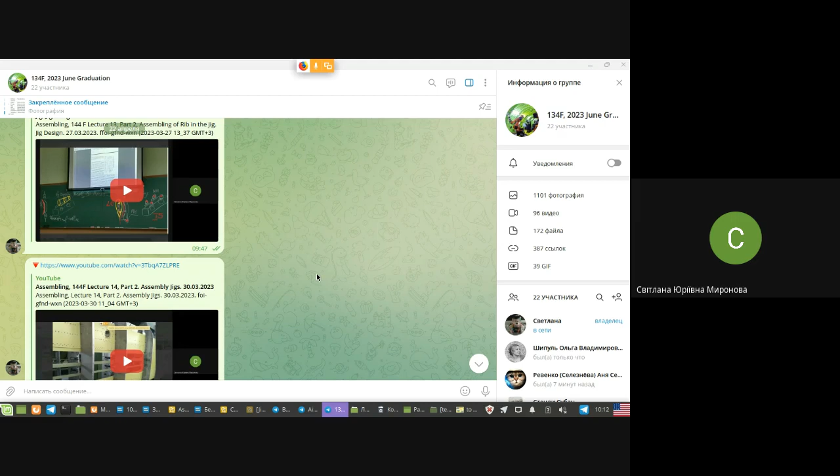My congratulations to Alena. She was there the first day, even 2 minutes before class, and she greeted the previous group, Ukrainian people. If you came on time, guys, you would have had the opportunity to make acquaintance too.

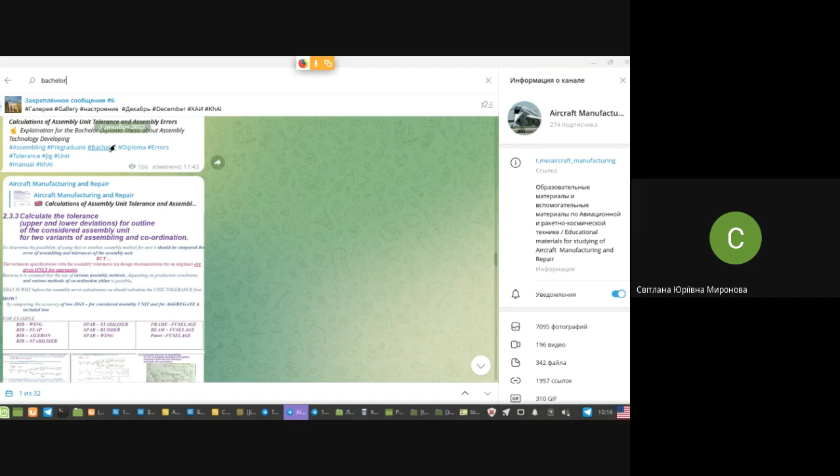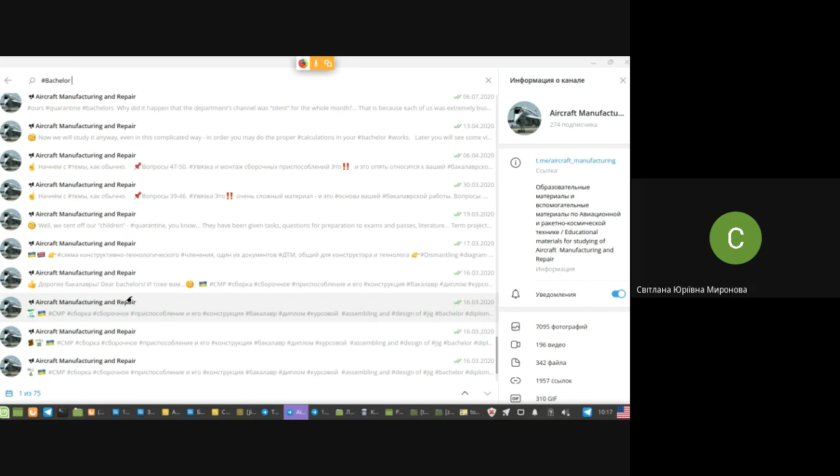And let's come back to the channel to find out the research, to find once again your file by the word. You also have it, these slides and this file. Actually it was in parallel with the lecture, but I meant another thing to do, I meant to find the task to open. It's the old variant of the task.

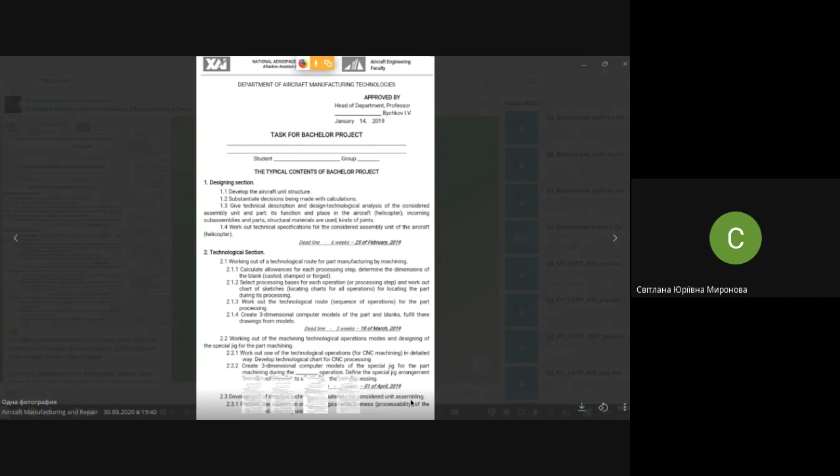Why am I trying to open it? In order to show you this, please, about assembling. You see the development of directive assembly materials. Once again, I remind you it's the old variant, maybe you have a new one now. I'm just trying to open the things related to assembly.

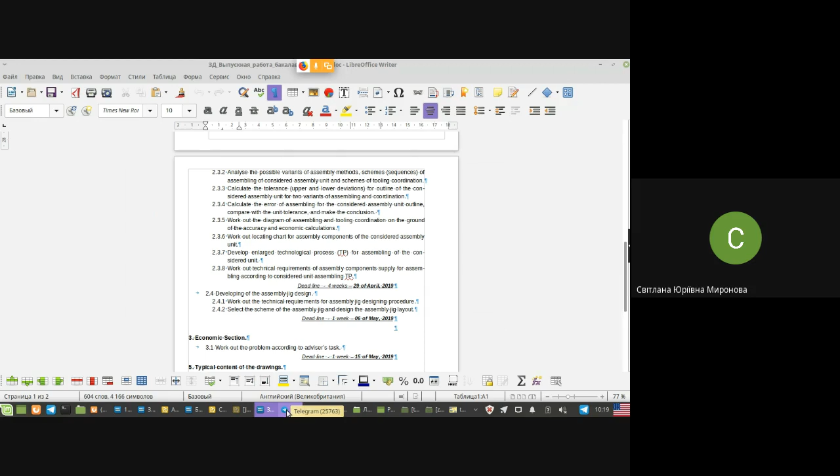I think we will even drop the video now. So, print screen, I will drop you a piece of it. Now you have it in the intermediate task, intermediate course discipline, in Mentor. And what we are interested in right now, look, what did I send you already as a reminder?

What is it? Error of tolerance of the unit and error of assembly calculating. Where it's directly related, pay attention. Item, it's even given here in this item, 2.3.3: calculate the tolerance for outlines. And next, calculate the error of assembling, item 2.3.4.

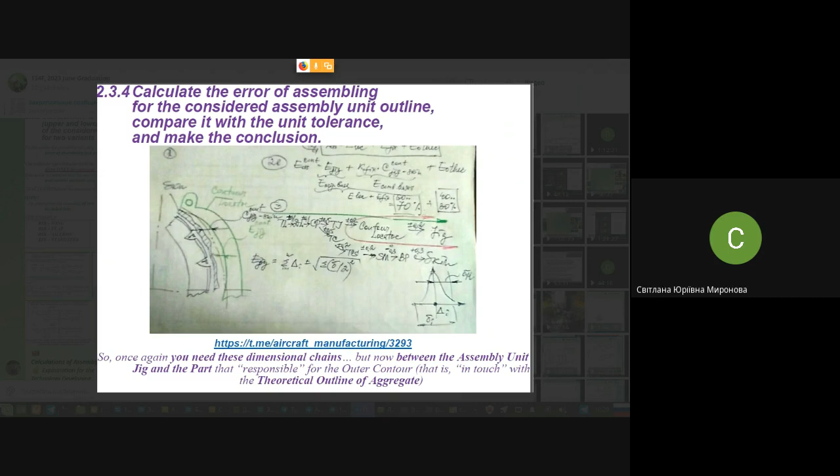In the video classes you have, you might repeat it again. We were discussing similar things with you too, but maybe not recorded, in the middle of the semester. You may repeat it and recollect the sequence of your actions, let it be whatever you suppose you need to do.

In item 2.3.3, you do calculation of chains, the jig and the jig of the aggregate, the jig of the unit, and you calculate the difference between them, the error of coordination between two jigs, so you may understand what is supposed to be the tolerance for your unit, because your unit is inside the aggregate. The tolerance, you know, the limits of sizes, you only know for the aggregate, for the outer contour of the aggregate.

You need to understand what the tolerance is for your unit, which is inside the aggregate. So you calculate the difference between two jigs. Next, you subtract this difference, calculated from the tolerance of the aggregate, and due to this you know what is described here.

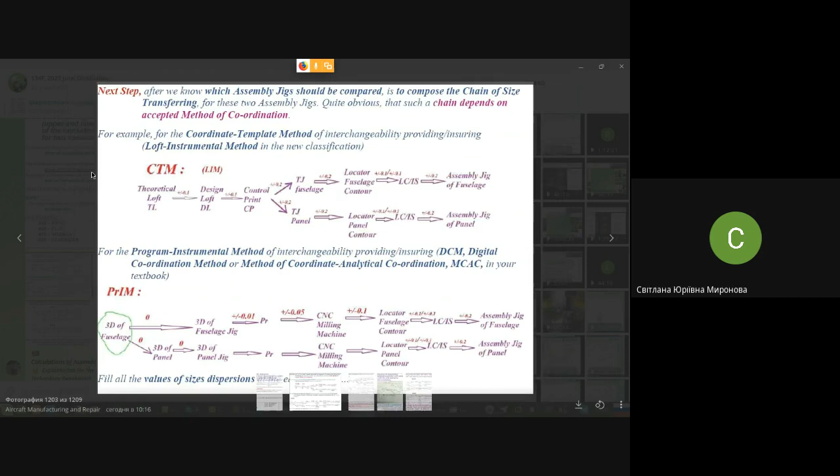Calculating this difference, substituting this difference, you see, unit tolerance equals aggregate tolerance minus error of coordination, the difference between two jigs, and you will know what is unit tolerance due to this.

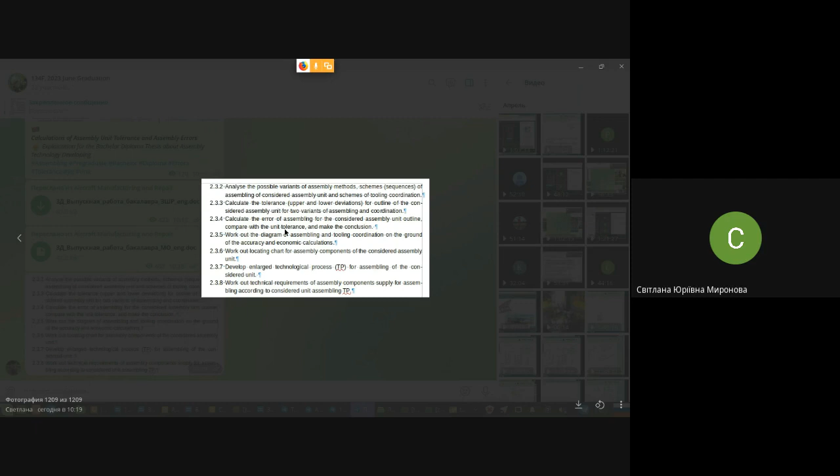Next, 2, 3, 4. Calculate the error of assembling. We have studied this together with you, and you have even, I trust, photo tracks there. Or somewhere here we will meet at the beginning of class with error calculations. Z1, for instance, yes? It's related to explanation about error calculation.

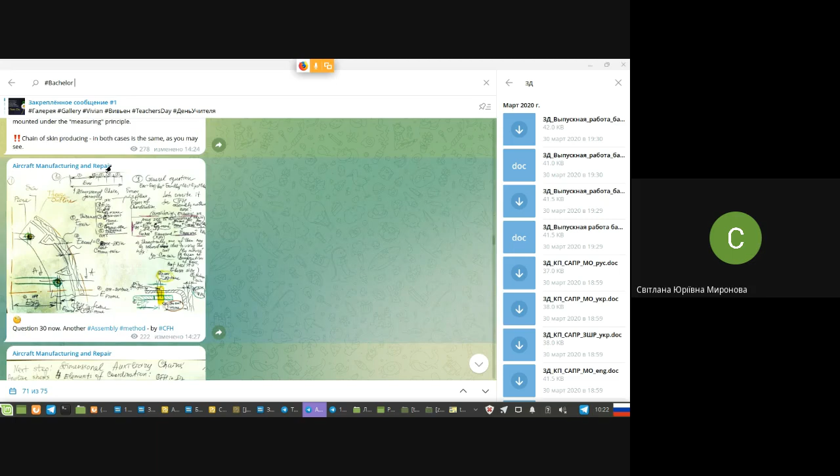Once again, these things, I'm just trying to remind you what you're supposed to remember in order to start calculation of accuracy. Each time, whatever you are working with, either calculation of tolerance or calculation of accuracy, you are working with so-called technological dimensional chains. After you have written these chains, everything else became just formal work. You just need to follow these chains in order to calculate everything around these chains.

And you may say, what is the error of assembling? What is the tolerance for unit? No problem, in case you have these chains. Question is where to take these chains. Actually, what these chains are about. Once again, remind you, these chains describe history, but in non-technical, non-scientific like explanation.

These chains describe history of object manufacturing and object pre-production. For instance, pay attention to the bottom line, skin. Skin was produced on bending punch. Bending punch was produced from sand mold. Since this place, bending punch and sand mold, it's already history of pre-production.

Sand mold was done by templates of cross sections. In turn, they were made from template of contour, recalculated from template of contour. Template of contour we took from control print, and control print actually it's a photo of design loft, and design loft was made from theoretical loft for old-fashioned techniques.

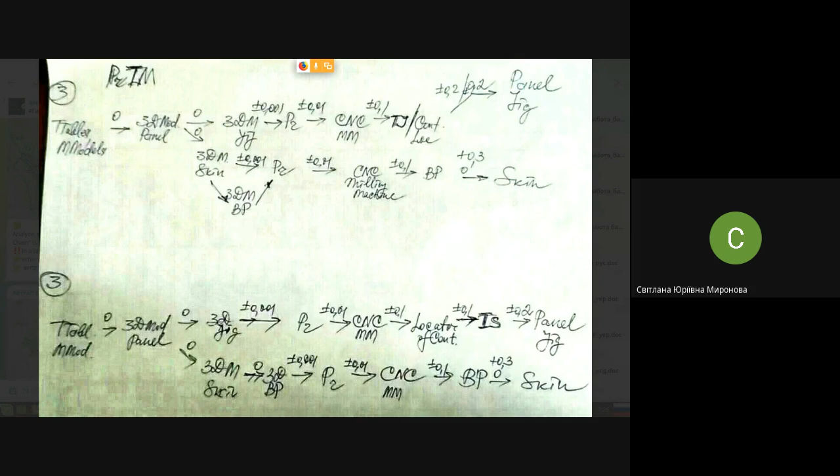And here you have heard this magic word, diagram of coordination. Where do we take these chains? In diagram of coordination. In your task, I hope I haven't closed it yet. No, didn't close it. Among the graphical materials, you have diagrams of assembling and coordination for tooling and parts.

In such a diagram, you will have chains which grow from bottom to the top. Also, we have already talked about those things. And also, you have even the whole video class explanation of how we compose such a diagram from pieces, from typified diagram. Two parts, let it be, in this diagram.

They are about the coordination of parts of assembly unit. If you have panel or if you have rib, whatsoever. On the left, you have order of assembling of this unit. On the right, you have order of jig assembling. About 1/3 of this diagram is about the manufacturing of jig, what jig consists of, and what was the history of its manufacturing. And then we're going to talk right now.

In the previous classes, I hope you already have seen even videos in order to repeat materials. Yes? Typified diagrams for rolled parts made of sheet, for stretched parts made of sheet.

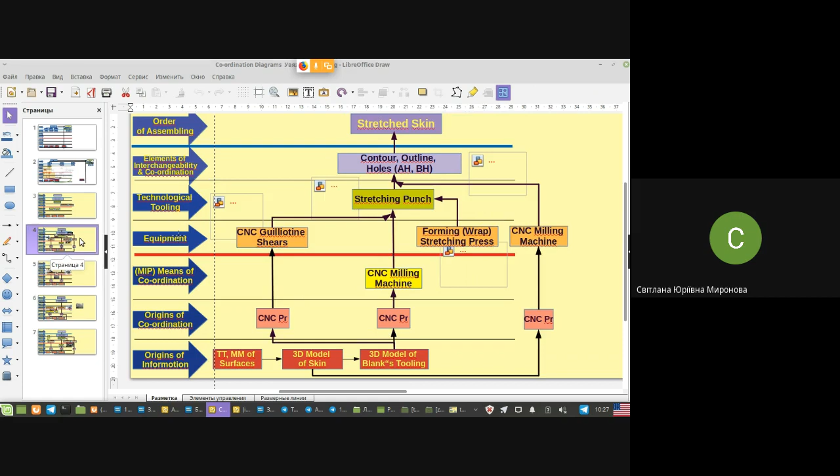Why it doesn't work? Because too many files are opened and I see preview normally, but I don't see the ready file. Those things we have already talked about.

It's typified diagram for parts. Now we are going to talk about typified diagrams for jigs. I will close this in order to reduce difficulties for the computer.

Wait a second. Yes, and that one. Whether we need it or not, no, maybe we will need it. Okay, let's stay here. What is it? Why?

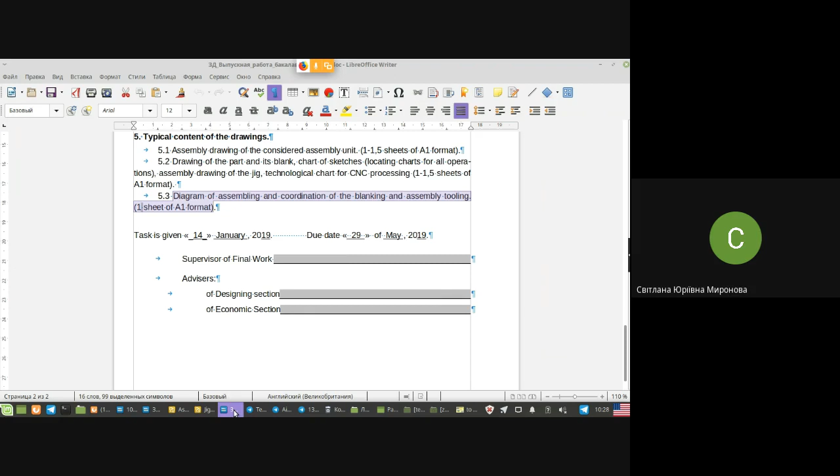Well, let's come back to the place. I said I will not explain you in progress, do forgive me. Actually, these diagrams were drawn together with another group practically during the class, and I will explain you only what you already see, like in result.

Above all, to compose the diagram of coordination, first we have divided this sheet onto 7 levels. You see, since bottom: origin of information, origin of coordination, means of coordination. Next, equipment, machines which we need, technological tooling, elements of interchangeability and coordination, and order of assembling.

And pay attention each time. Next, we will talk about assembly jig. Maybe some diagrams are not finished, I do not remember this. Maybe some diagrams we don't even need. We will see it later.

Look, to start with, order of assembling. What do we have? Assembly jig. Assembly jig typically consists of some skeleton, carcass, and some locators. Not all the jig has all types of locators, not all the jig needed. Here it just explained the maximum possible set of locators that you may meet in your bachelor work.

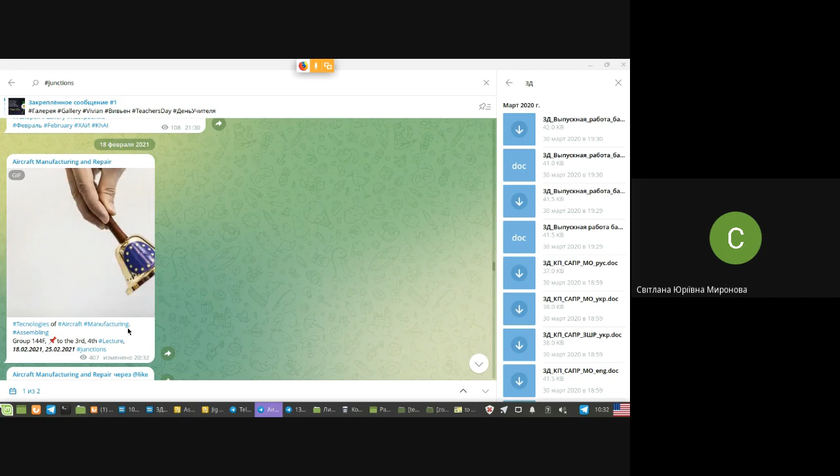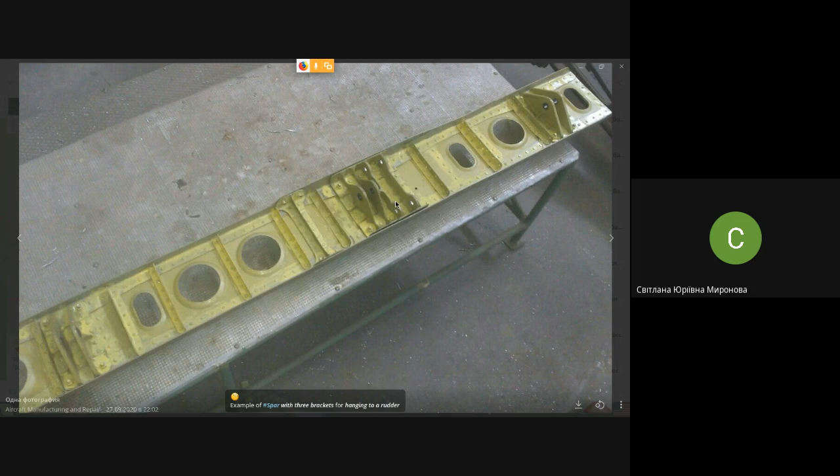You see now this spar is hanged on locators of fork type junctions, just in order you may recollect it. Similar things we were talking about when we were talking about the jigs at all, when we were talking about the lab mounting standard and so on.

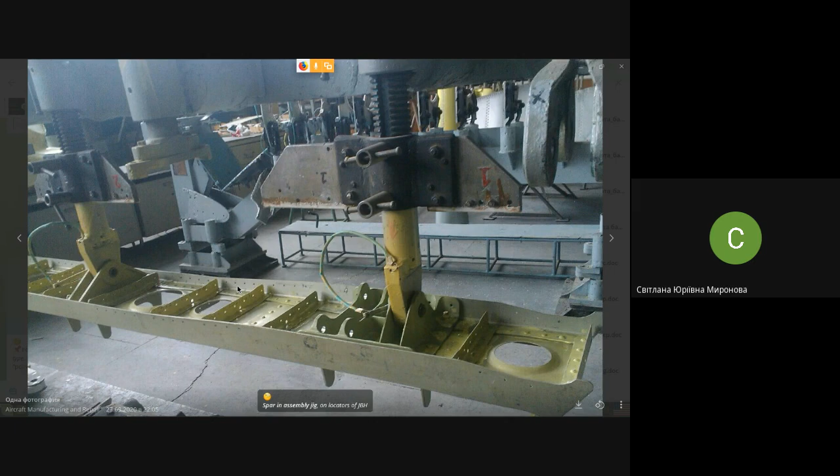What do we see right now? We see that locators of junctions that we are going to place here, you see they are separate, yes? But they must be on correct distance, they must be on the same axis. How did they find this place, these elements of jigs? Elements of jigs, I'm not talking about spar right now. How did they find such a place?

They were located by special gauge, you see. Some imitation of wing or imitation of flap, whatsoever you have. This imitation was necessary, this imitator, pretender, it's called gauge of junctions. It was necessary to repeat all the places with very high accuracy. And when you mount in the jig, you attach elements of jig to such a junction.

Why don't we call it mounting standard? Because it does not repeat all the aggregate, it does not repeat it in cross sections like this one, for instance. That is what this couple is, no? They are not just junctions. To be frank, they are mounting standard because they have both elements of junctions and elements of outlines. You see, they are repeating these outer contours. They are mounting standard, that is the only difference.

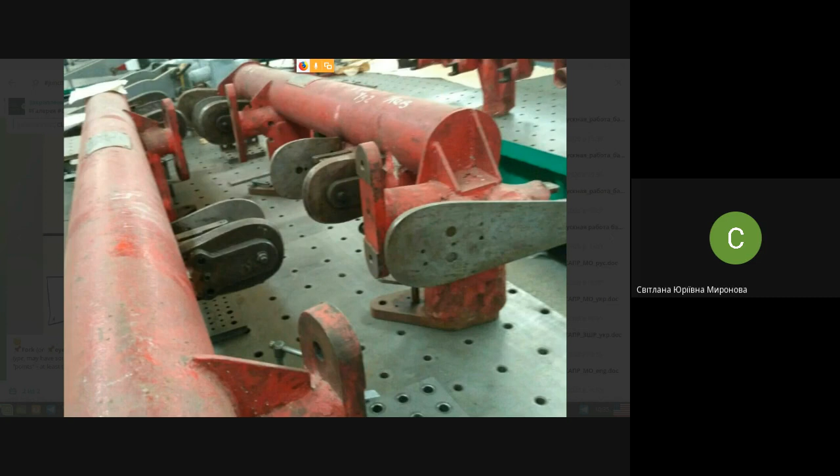In both cases, we are talking about mock-up of our airplane, partial mock-up or the whole mock-up. And this mock-up has ideal variants, let it be imitators, either brackets or contours or whatsoever we need. And when we were talking about flange junctions, let me remind you about such type of junction.

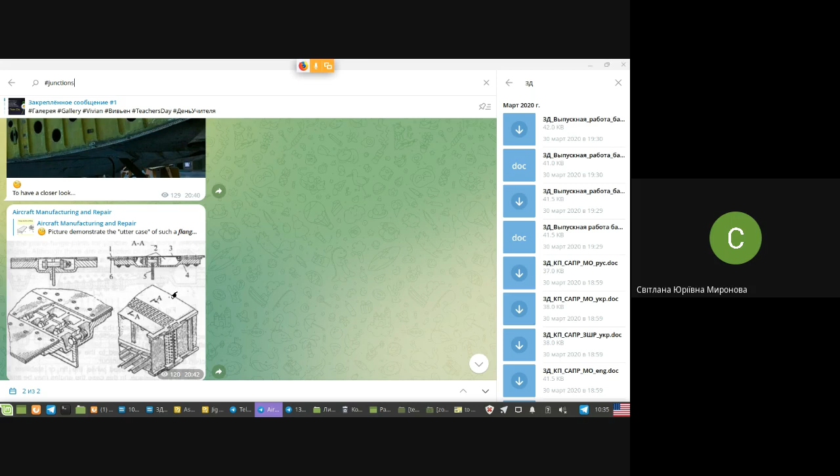It's appeared that it's even worse, especially when it comes to attaching the wing and fuselage, the stabilizer and fuselage, for instance, and especially because of responsibility of these holes.

It's appeared that the jig is supposed to have a special element which repeats both holes and flat surface. Usually it's one surface, but this surface is realized on a good dozen of parts. Here we see a photo of the stabilizer, and we see some elements of stabilizer spar, which actually consist of different parts in contact with this surface, like top cap, bottom cap, web, stiffener, rear spar, also some parts. This first rib, root rib, also consists of some elements, and all these elements must be aligned into one surface because they all have holes for attaching the stabilizer to the fuselage.

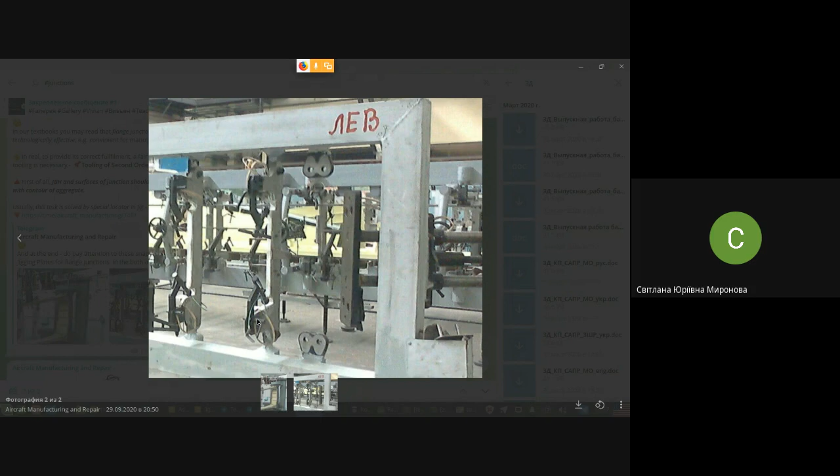What that is, the jig of stabilizer as a whole, and jigging plate of stabilizer jig, is a special structure which imitates a straight, flat surface, and has all the holes of GBH that you need. And that is, you see, jigging plate in a jig for spar already. By the way, it's visible that the whole jig, what it looks like, is a skeleton and system of locators and clamps. I hope you remember all those pictures you are recollecting.

Let's come back to the diagram. Now the question is, as I said, how to locate all the elements in proper position with respect to each other. We have the jigging plate, we have the GBH locator, and all these must be united by a skeleton in the system, which gives us correct results after assembling.

It's not mentioned, what is it? No? How we may do it? Locate separate pieces in the proper position.

Once again, let's come back to your chart. I hope you remember this explanation, that we have only two ways. Either we are copying sizes of jig from the carrier of these sizes, shown here as the element of tooling, either mock-up or gauge. It's the way of copying. We place on the skeleton, the empty skeleton of jig, this mock-up, and attach all the elements of jig to this mock-up.

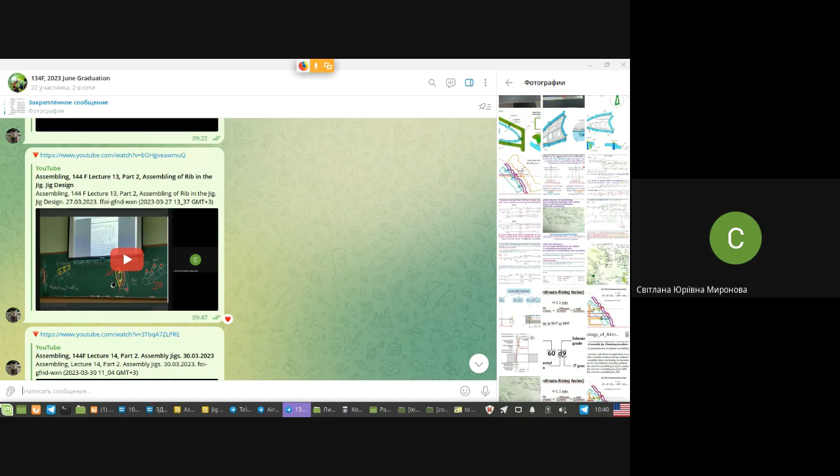30 or 40 years ago, it was sort of science fiction that we may do something like this. We could measure some elements only either with optical devices or mechanical devices, like usual rulers. So instead of measuring complex contours, we were measuring the simple elements of jig. What are the simple elements of jig? Holes, certainly.

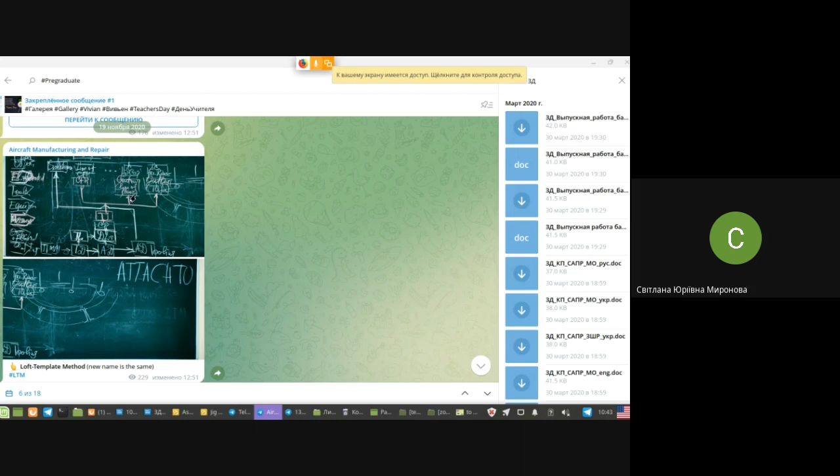Let's come back to the previous scheme. You see two photos - the long blackboard in our 203 class. I made a photo of the whole blackboard and divided things into pieces. You see the overlap of these pieces.

Well, let's come back to the diagrams that we have seen in this file, and let's compare to what you see in Blackboard. Look, diagram order of assembly jig, skeleton, and some locators, some types of locators that we need. Under each locator, we wrote what we are interested in exactly for this locator.

Either its contour, like its final locator, or its GBH, or its CFH. What do you see in the diagram right now? A jig, which consists of skeleton, some locators, locator of CFH, locator of them. You may call it by names of parts whatsoever. But how to understand what sort of locator we have?

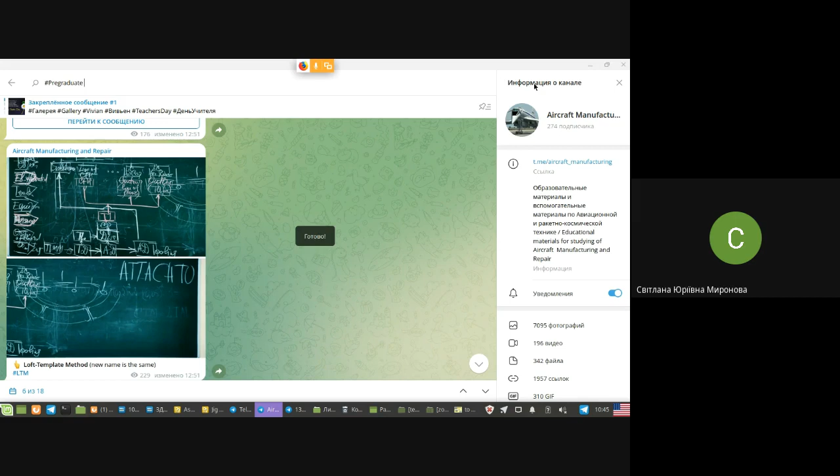The laboratory class that you had as your very first laboratory class, that one about assembling the spar by assembly holes and by their... remind me. In a jig, yes? I just copied you once again, the same that you have already studied.

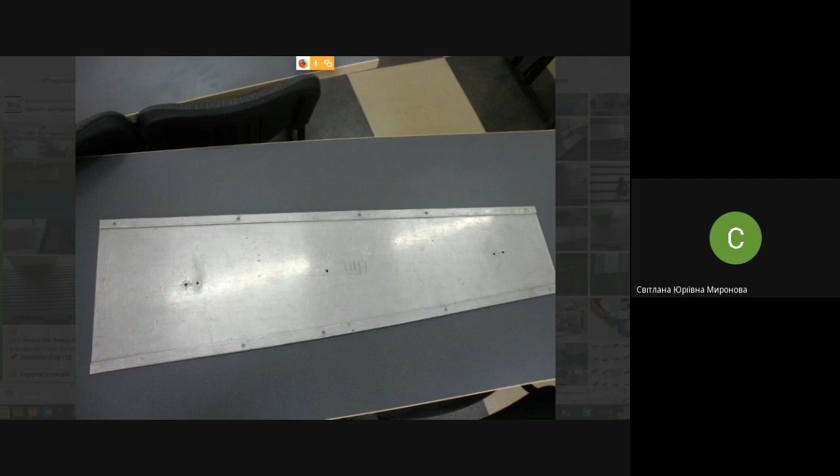And how do we assemble the jig? We had a template, flat imitator of outer contours of the spar, and CFH of the spar. And what did we do next? We attached all these elements, whatever, all the locators that we need. We attached locators to the template. Next, we fixed them in this position. And next, we have a ready jig.

How to describe it in schematic way? Look, we have template, and all the locators, they are joined to this template, as you might see. Template and all locators are placed by the template.

What is the history of their appearing? It was template, and now all the locators know their place. And what is under the template? It's history of appearing of the template, how the template was produced.

Let's come back once again to this diagram that we have. Here it's not template. Here the template is a two-dimensional element. Here you see mounting standard, and next you see this complex line which leads to all the elements of jig. That is, it means attached

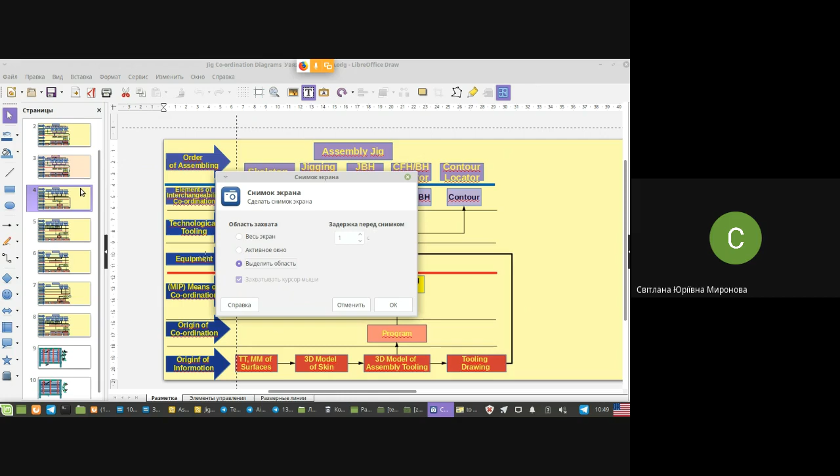What is the difference? I hope it's already obvious for you. Look, the top is the top of the diagram. Is it different or not? No, unless we're talking about some lines I forgot to do here.

Alina, do you see any difference at the top of the diagram? Yes, madam. You see differences at the top? Assembly jig, skeleton, jigging plate. Do you see differences at the top, above the red line, here and there?

Hmm? No or yes? Voice help, please. I see you, Sin, I see Stanley, I see Angelic, and I see Godwin. Do you notice any difference? I mean, significant difference. Maybe amount of elements is different or elements of interchangeability.

Look, visible? The top of the diagram is the same. These purple lines, is it the same or not? Purple lines, purple blocks.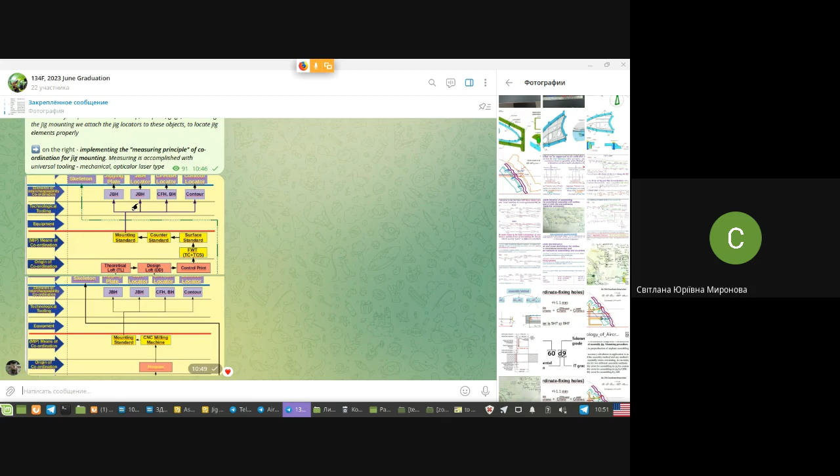Same, the same, no difference. What is different? Look, under the red line, you have quite different rectangles. You have different history of appearing of mounting standard.

Mounting standard, according to traditional techniques, which been in use for the first 50, 70 years of aviation age, was made immediately from another mock-ups, like surface standard, counter standard, and so on, by molding, like we were talking about in our laboratory work.

And those mock-ups in turn, they were made by some templates which came from lofts. If necessary, we may open even right now the book about aircraft tooling, about templates, American books that we used during third year, these historical books already.

Now, what we may do now, we may cut such a master model, master mockup mounting standard, in a CNC milling machine controlled by a program. And this program is generated from the 3D model of assembly tooling, as you might see. So you may have a 3D model of tooling. It includes the jig and any elements that you need, like this mounting standard or template.

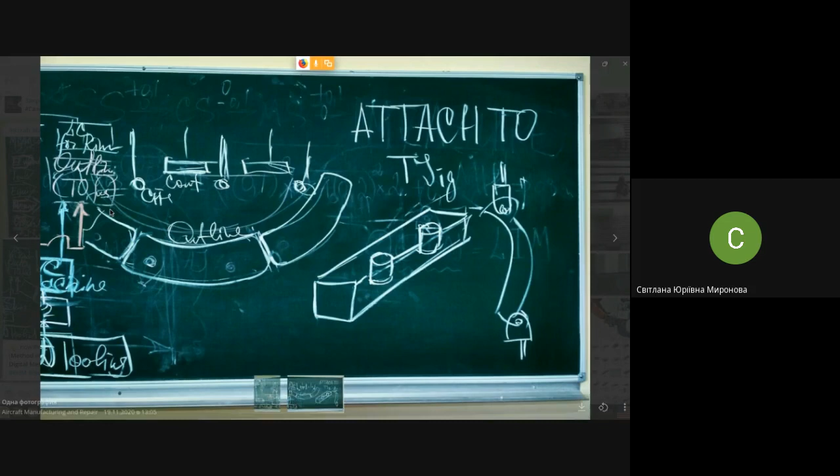Spatial position. Let's compare this one to what we have seen in yellow, in the yellow picture. The same. CNC machine does the mounting standard, and so on.

Seems like from the CNC machine there must be one more line. To be frank, it must even be a separate program, even with the same CNC machine, or maybe a separate CNC machine, and one more line to the contour locator, so we may understand that the contour locator also has complex contours. It's supposed to be cut in the CNC machine.

So no difference, as you might see, whether you use mounting standard or you use this, remind me, where is it? Template of jig. Difference appears only when you change the method of coordination. But the principle, this attaching or measuring, is another story. For each such principle, you may use some different techniques of coordination.

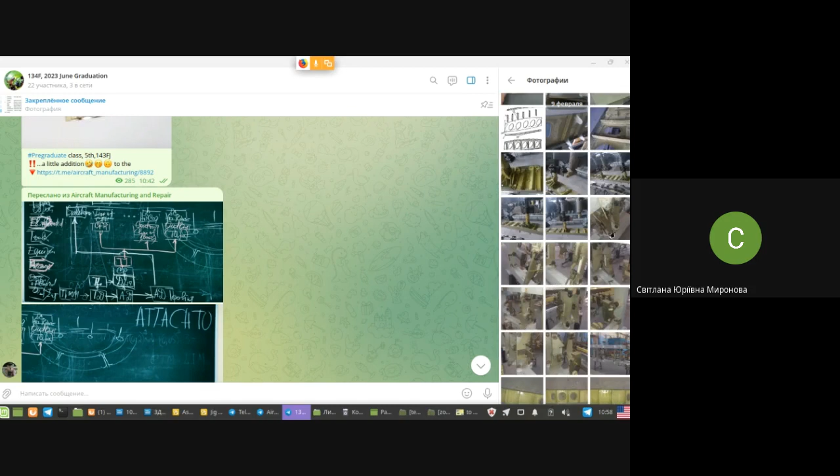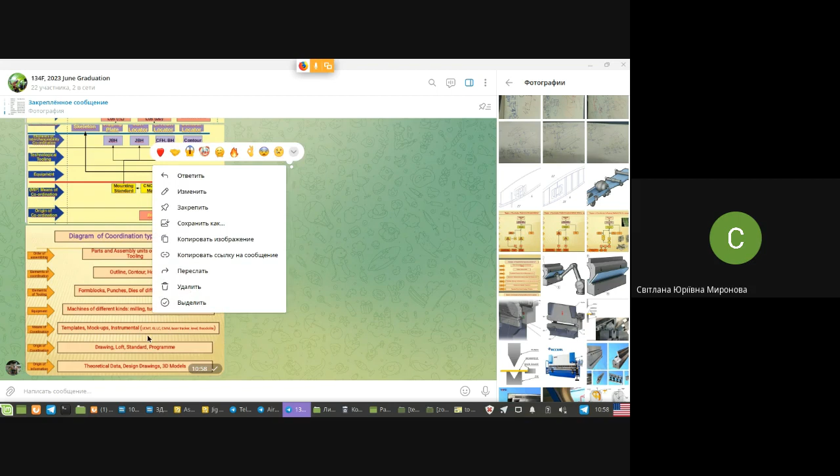What are these different techniques? Remind me. I see. I'm about to cry. So, let's find one more picture. Here it must be.

Look, what this coordination is, this copying principle and measuring principle. And copying principle, in turn, it's maybe by template and by mockup. Pay attention, what is written here?

It's level of what? Say it. Read it. Do we have someone brave in class right now? Alena is the bravest out of our boys, I see. Godwin, Yasin, Angelik, Stanley, please. Yes, what is it, ma'am. What is written? What's this word, what do you see?

Means, means, yes, exactly as he said. Alina is the bravest boy in class. Why? The only girl, the only lady that we have, she is the bravest boy in class. How did that happen?

So, now, other brave boys, please don't answer me. Where do you see 'means' here, what are the means? Visible? What are the means, gentlemen?

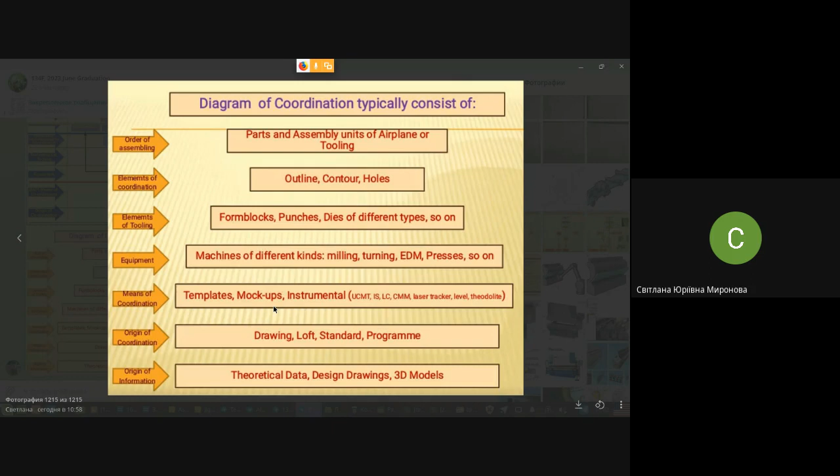Template mockup approach is the same, but the history of appearing, the means of realization of template and mockup in this case, they are different. Either you cut them in a CNC machine, or you are also passing the complex history of pre-production of this template and mockup.

Guys, you make me cry today, as usually. Now, what is changed now? Pay attention. What, with respect to what you have seen here.

Wait, where's the 3D model, lofts? Oh, I found lofts, yes. Look, we have theoretical drawings and lofts here, and here's how it happened, because I'm time to time just changing position of slides in order to have quick access to some of them. So what is changed here?

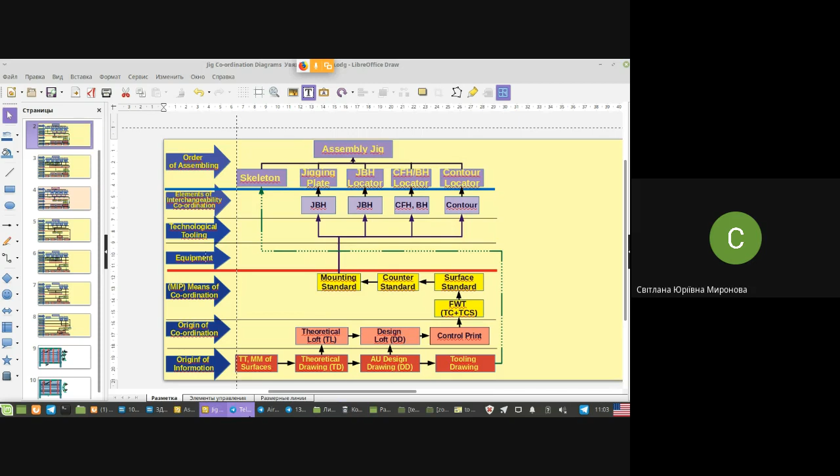Pay attention. In the first case, which I asked you about, whether something has changed at the top of the diagram or not, we understood at last - no, nothing changed. But in this couple of pictures, nothing changed either.

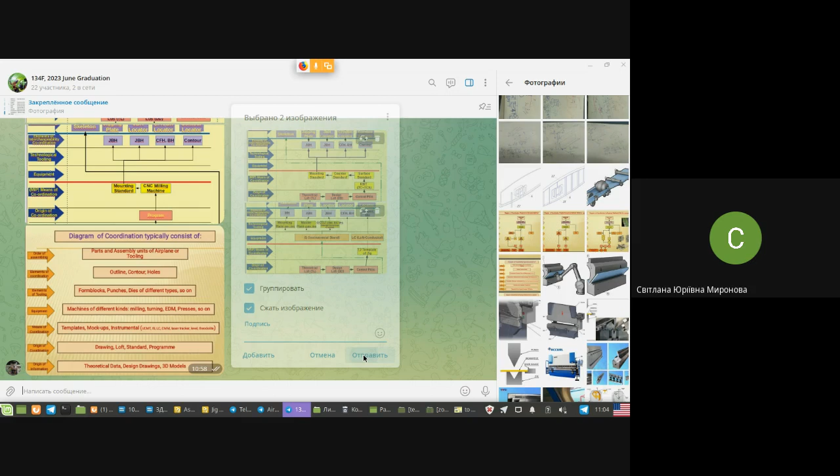Now we have another couple of pictures, the same first one that we have, like mounting by mounting standard, and one more. The jig is the same, it's still the same jig. You see that the compound of jig hasn't changed: assembly jig, skeleton, jigging plate, and you see everything beside of skeleton.

By the way, once again, let's come back to this first couple of slides. Everything besides of skeleton was attached to mounting standard. How was skeleton produced? From drawing. You see, tooling drawing at the bottom, but this line is from tooling drawing.

Drawing of tooling might appear either from design drawing of unit, or in case of modern techniques, tooling drawing was generated from 3D model of assembly tooling, and 3D model of assembly tooling in turn was generated from 3D model of unit.

But anyway, skeleton was made by tooling drawing, and pay attention, no tooling, no equipment is necessary, just line without anything at all. Because skeleton is the most rough, the least exact element of jig in this case, and no one is interested in any element of coordination in the skeleton of jig.

Now we change the approach, people. What does it mean we change the approach? First approach was copying of sizes, and another approach is measuring of sizes. Let's change approach - it was attaching, and now it goes to the measuring.

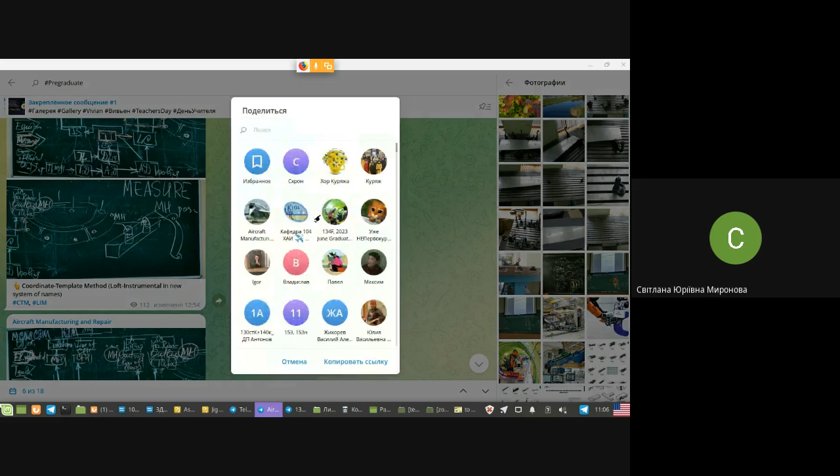Do pay attention what happened. The scheme became more complicated - this scheme and that one. That one looks practically simple, empty in comparison to this one. But the sub-elements, the footage, they are the same. If you compare this diagram and that diagram, everything is the same - the same template of jig, you see.

But what happened next is disaster, really, for most of you. No, not that one, that one. What happened? Let's try to understand. So, program template method we don't need. We need instrumental method.

Coordinate template method - that's the old name you might find in a book. Now in the modern system of classification, it will be called loft instrumental method, because you take loft as origin of coordination in this orange diagram, and template as...

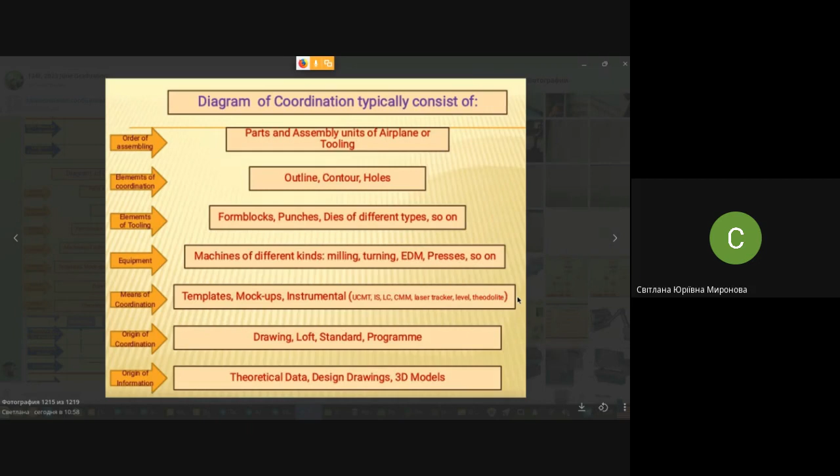Coordinate template - it was called this because it involves measuring the coordinates, and that is why historically this technique got the name coordinate template method. In the new system, which tries to identify everything according to the origin of coordination and the means of coordination, as origin of coordination we have loft, and as means of coordination we have instrumental means for measuring - so it's called loft instrumental method.

So let's see once again. This coordinate template method you see written here is the loft instrumental method in the new system of names. What has changed above, with respect to this one? Previously, in the line of skeleton logic, it was nothing - it was related only to the drawing of tooling. Here is the drawing of tooling, and here is the skeleton.

But along the way, some additional elements have appeared. What are these additional elements?

Also, we have laboratory classes. All your laboratory classes have immediate relation to what we are studying next, which you are trying to implement next into your bachelor work.

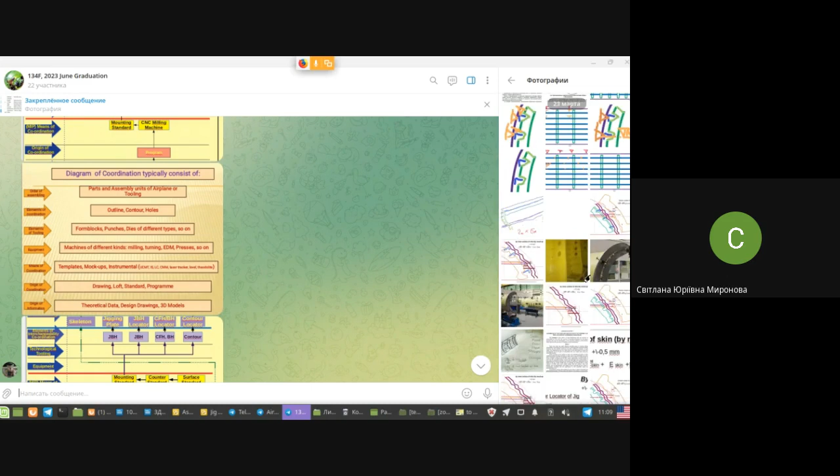Look at this, look at this beauty. What is it? Tell me. At least read it here - do you see where I'm pointing? Do we have any brave person? What is it? Instrumental... stand! Thank you, Angelica.

Instrumental stand, and another thing that is a three-dimensional ruler. I hope you also have seen the video with explanations - a three-dimensional ruler and a two-dimensional ruler, which is called a loft conductor. Forgive me, I'm a bit tired of scrolling, and you may also be tired of this permanent scrolling up and down, so I won't search for these pictures right now or open additional books to remind you.

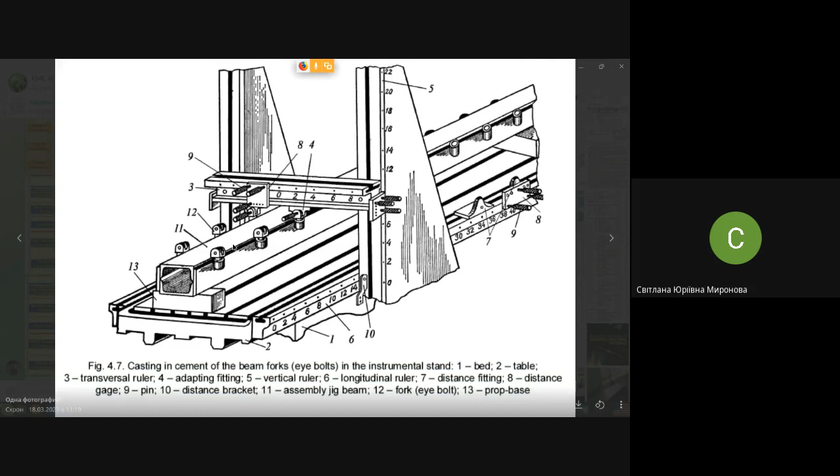But I hope you remember that this is a device for measuring the coordinates of mounting holes in a skeleton of a jig. These are preliminary - no, they are not locators, they are actually something like holders for locators. We call them intermediate connectors - something like brackets with mounting holes.

In our country, we usually place these brackets on cement just because it's simple and very cheap, in contrast to making joints with screws, bolts, and pins additionally for accuracy. Using special mounting cement is the ideal variant in terms of labor input saving and in terms of complexity of work and the qualification of the employee doing this.

So, once again, where in the diagram do you see such a thing? In the very right portion of this short explanation about jig mounting, you see that we have the beam with these fork-like connectors, or eye-type connectors, eye bolts, and pay attention - marked in red color, whether on the left or on the right, is what we're interested in.

In case we're using the copying technique, we're really only interested in outlines, in these contours - we only care about the contour of locators. Now, since we are going to measure the position of locators with respect to each other, we're really interested in these contours, but we implement additional measuring bases - these mounting holes. They existed in the left picture, in this approach, but we're not interested in their positioning at all - they're just holes for connecting, nothing more.

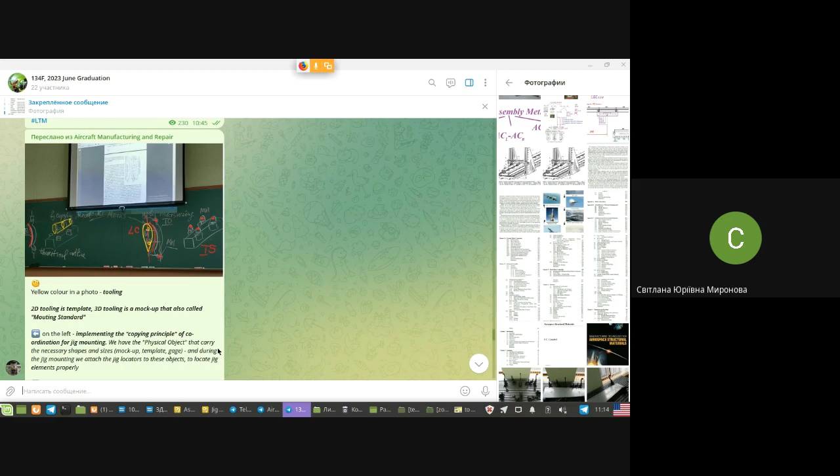So we are interested in elements called mounting holes, and pay attention to the difference between this scheme and the scheme for the copying technique. Here, in contour locators, we have only contour - in the copying technique it was a mounting standard or template, only contour, and nothing else in the skeleton object.

Now pay attention to the scheme which uses the measuring approach. Look at the contour locator - what has happened? What do you see here additionally? MH - what is it? Mounting... help me.

Don't make me cry. MH is mounting what? Help me. Okay, you made me cry - my keyboard is already really wet, it's already the drop of my tears, the pool of my tears between the keys on the keyboard. Hole - mounting hole. Why are you afraid to open your mouth? Are you afraid of the recording or what?

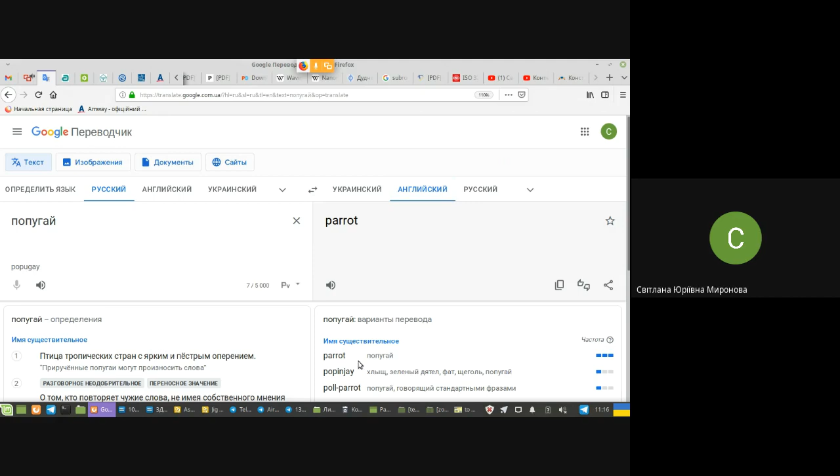Well, those... it's easy to... Parrot. Parrots, of course. If you forgot, was it parrot? Yes, parrot, you know those things, those creatures. Some of them are quite able to imitate people's voices, like this one. Very beautiful, yes?

You don't like it? We like it, madam. I have someone, you have a small one? Angelica, and usually this small one is sitting in front of you at the computer, yes? No? Then answer me please, when I'm asking questions, answer me. MH, what does it mean, this MH? What is it, mounting?

Contour, hole, not contour, hole, mounting hole. Look, in the contour locator we have this - why we do something, in order that you may know something. If you do not understand what I'm explaining, then I'm just wasting my time and your time. Contour is this red line, look, here is the contour.

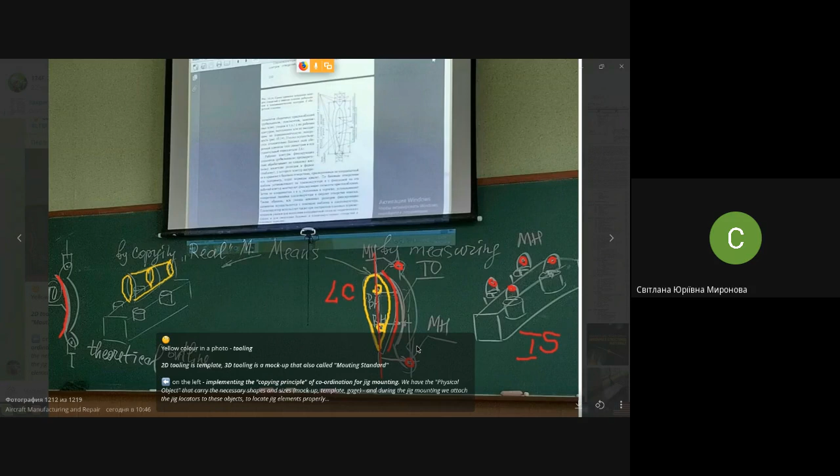Look, what is the difference between these two diagrams? In this case, in the diagram of coordination, we are not interested - as I said - in the left picture, correspond to the left picture. We are not interested in mounting holes. In the contour locator we have only the contour. In the skeleton we have nothing at all.

We are not interested. Now, in the contour locator, besides the contour, mounting holes have appeared, so? And in the skeleton also mounting holes have appeared. I'm just closing the messages one by one so they don't appear open on the screen while we are recording in front of everyone.

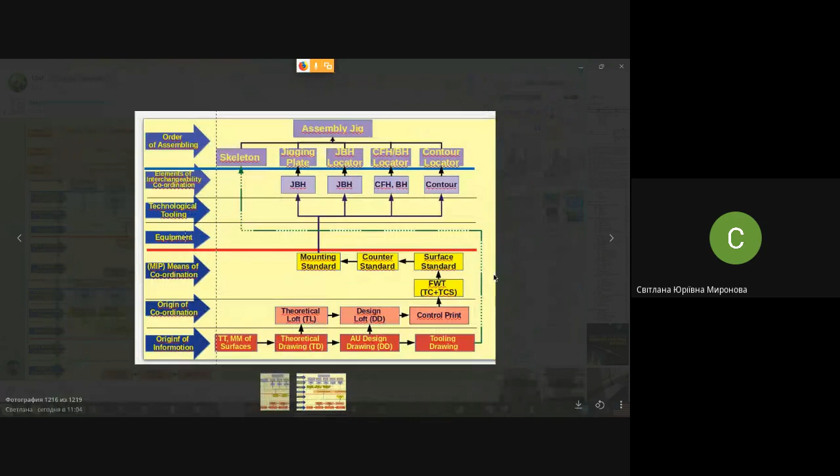Pay attention, in the previous diagram, look at this, template of jig. And there we had - no, mounting standard, yes, no template of jig. Let it be template of jig, doesn't matter. Template of jig here, and nothing else, no any element of equipment. And template of jig here, and additionally we have some elements of equipment.

And the worst, look, here in technological tooling, nothing, no block at all. Mounting standard is responsible for everything. Mounting standard or template, and it's enough. Great, we have everything already, we just need to attach everything to the mounting standard or to the template.

Here, people do a lot of additional tooling, a lot of additional equipment. Actually, what I wrote here as equipment, to be completely frank, must be even in means of coordination. We wrote them as equipment, but they must be here in means of coordination because they are means of measuring.

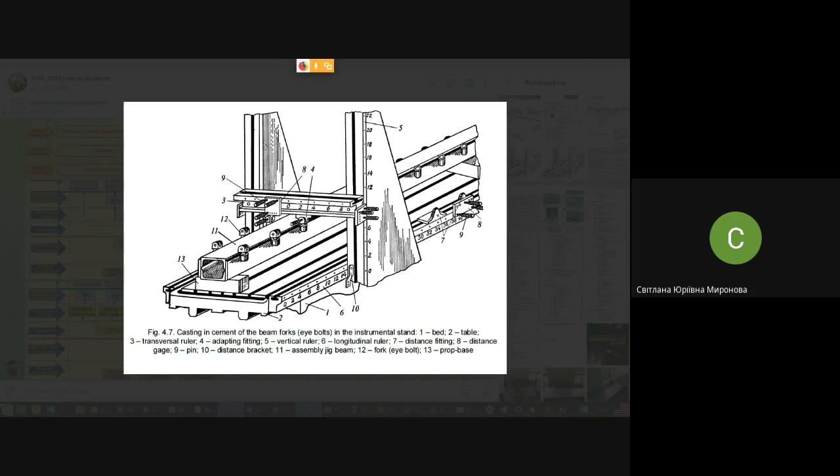Look, this diagram is just stuffed with everything. As soon as we come into another technique, another approach, it appears that we need mounting holes in the skeleton, mounting holes in contour locators. We had it before, but in any position actually. Now we need it in exact position and we must measure them. How are we going to measure them? We have an instrumental stand to measure position of mounting holes in a skeleton, but we just saw that mounting holes in a skeleton - there we see not the whole skeleton, we see one separate beam.

How we may measure position of - no, let's recollect what we have here, it's opened. Oh look, those jigs that we have seen partially, now we see the whole picture of this jig. This slide you also have, in Mentor you have it, you have in the group those slides with jigs. So please, if you need, you may open it and take photos if you need. Or that one, look at this jig - where are the mounting holes?

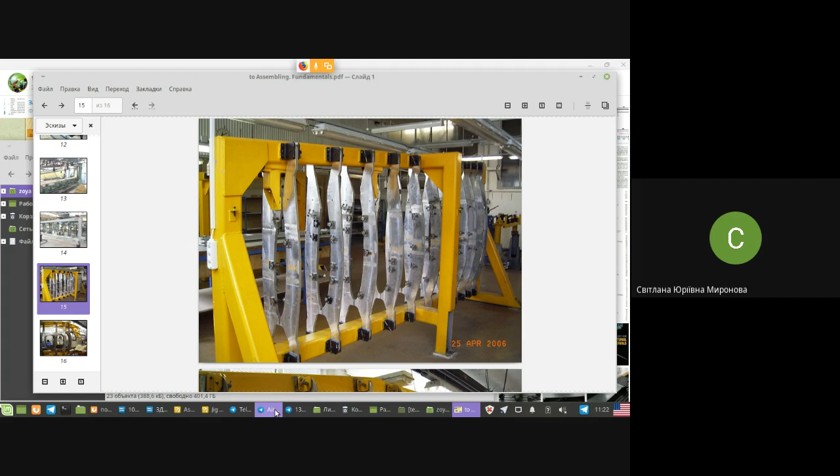Take this photo. Thinking - the computer is thinking, sorry.

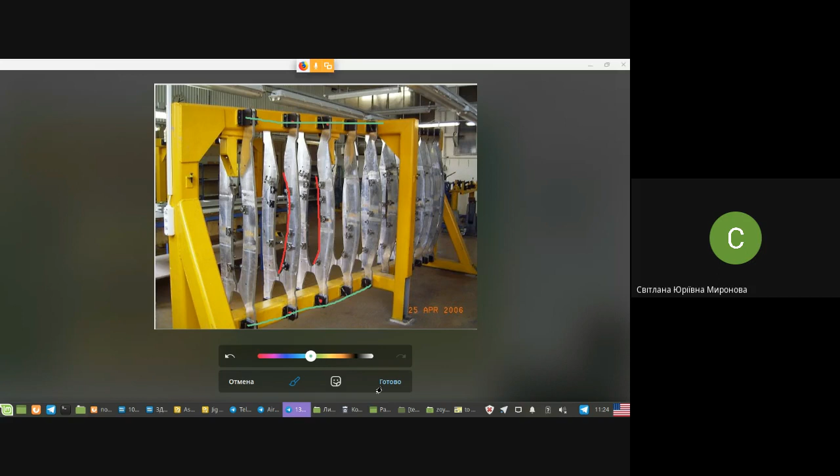Also, such things we were discussing, look, in some different variants. We're talking about the same things each time. Where did it disappear? So much things I have copied here that it's practically difficult to find anything.

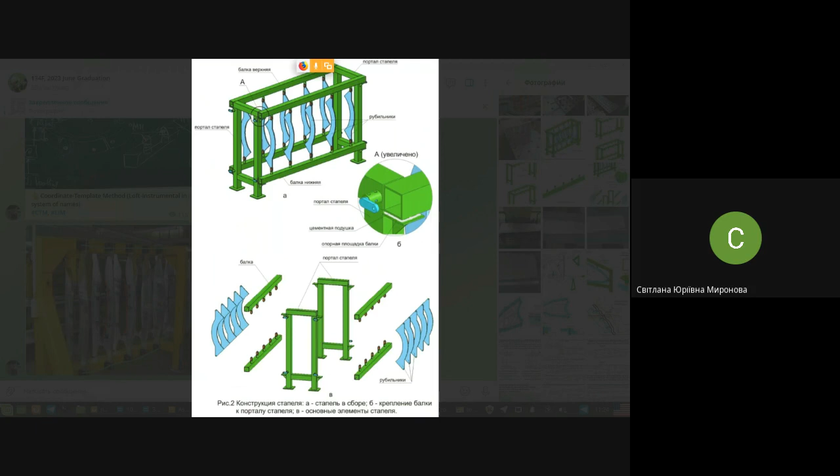What are those? Look, how to make the jig, yes? How to make this jig if they have separate columns and beams? They have only separate beams, but they need the whole skeleton, this green skeleton. How were they assembled from pieces?

It's also important. Look, once again, these elements they belong to - that yellow frame that you see - they might belong to separate elements, these mounting holes. And the first problem at all may appear, not in your bachelor work I hope, because you don't have a big jig. The first problem is how to align elements of the skeleton with respect to each other, which you also studied in your laboratory class.

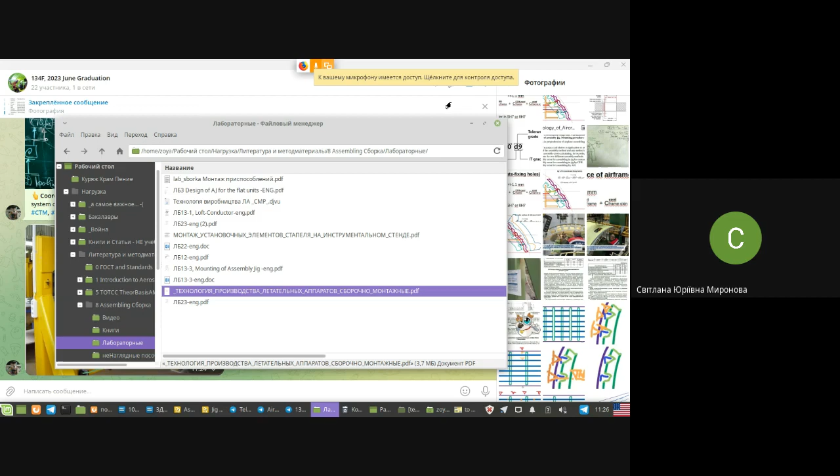Maybe I will open the book at last. I'm tired of searching for pictures. Let's open our manual, the lectures. Manuals about labs here.

It's the lab about mounting standard. I hope you're recollecting. That is the story that we need. Look.

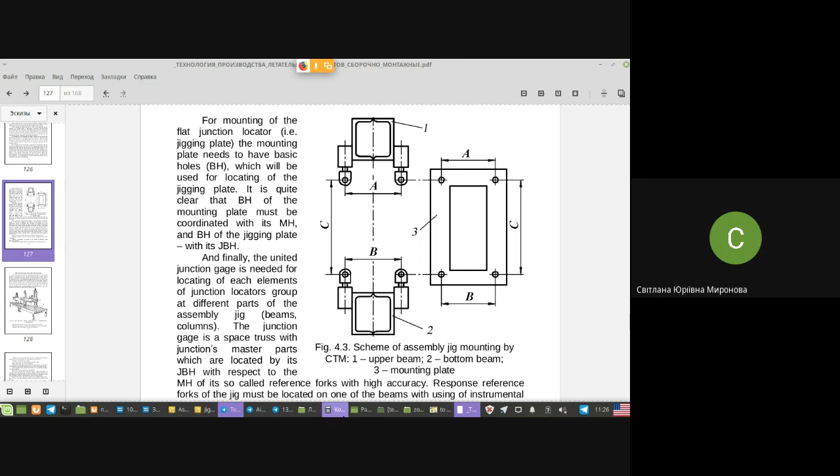How you may mount one beam and another beam into correct mutual position. You see now it's shaded, but anyway you see the previous picture of the jig. You need to align this bottom beam and upper beam into correct position. There are two ways again.

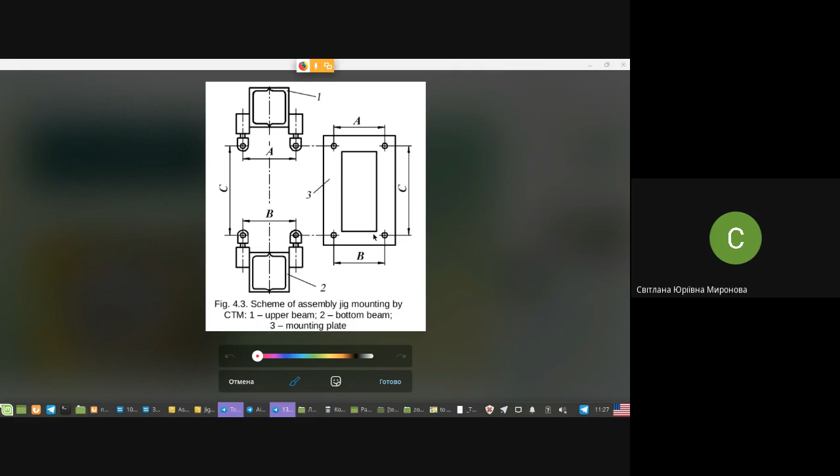Either you do a mock-up, and this mock-up is a mock-up of second tooling order. This mock-up's name is mounting plate. You do a mock-up, something like a gauge of mounting holes. In this gauge you repeat: this hole is here, this hole is here. If you place this mock-up on one side and on another side of these beams, you may align these beams because this mock-up is stiff. When you attach it to beams from one side - imagine you place this mock-up when you're mounting the jig, to this side and such a thing on the other side - you already have no opportunity to spoil, let's say, the distance between the jig.

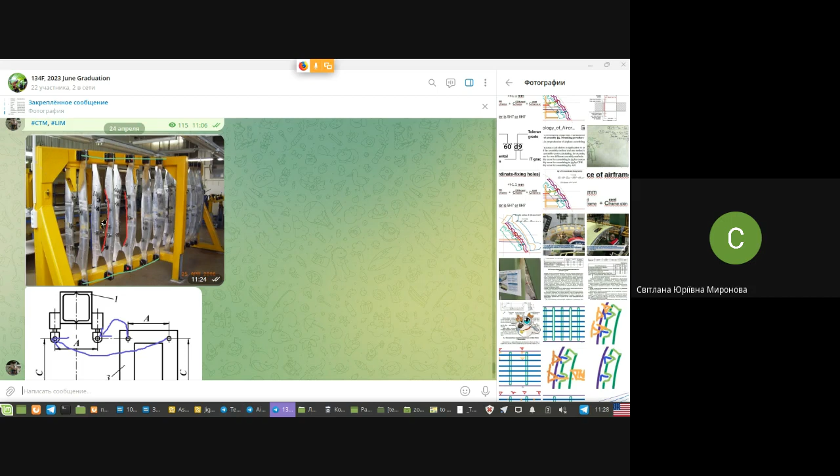That was one approach. Another approach is the one we have seen in the picture - with measuring. You see, they are measuring position. Again, measuring position of what? Of holes. They added rulers, lasers here, and now they are aligning everything by measuring.

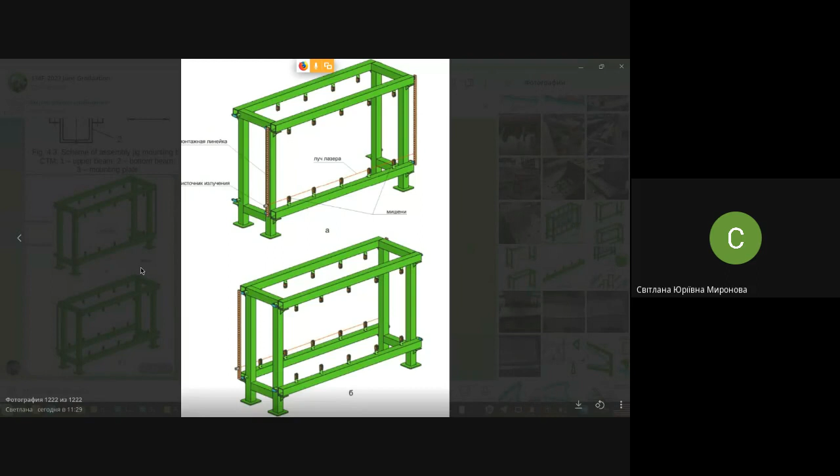When we're using this approach, it's less reliable because it depends on the people who measure, above all. And the other one has fewer random mistakes, because once you made this imitator of mounting holes in the beams of the jig, you may assemble this assembly jig with the mounting plate rather easily, without any additional thinking, and you are guaranteed against mistakes in this case. Due to the mounting plate, you are aligning the system of holes of the top beam, of the bottom beam.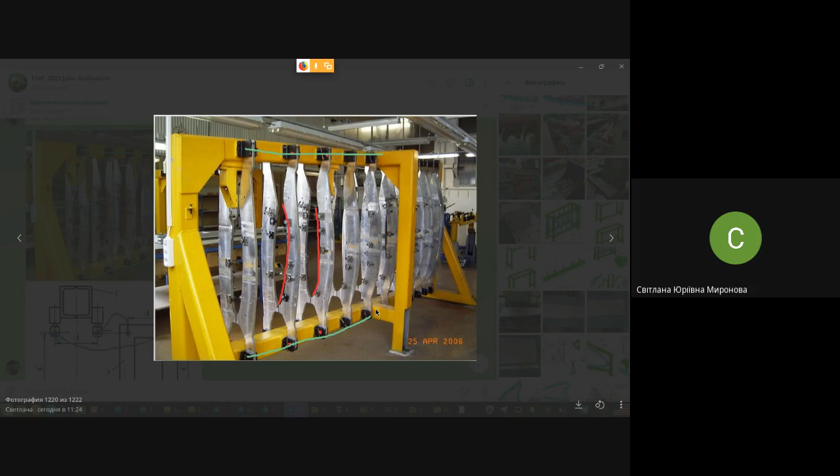Maybe you have even 5 beams. If you have a jig fuselage for instance, let's see here. You see they have more than one beam in such a jig. That is the last photo in this presentation.

You see they have one beam, second beam, third beam, fourth beam maybe, and in order to align these mounting holes in all the beams, in order to unite all these separate elements like we have just seen in such photos - there are some separate elements - either you have mounting plates, or again you must measure something.

And how is it reflected in a diagram? Look, the fact that now we changed the method of coordination, how it's reflected in the diagram. Above all, in contour locators mounting holes have appeared, and in the skeleton mounting holes have appeared.

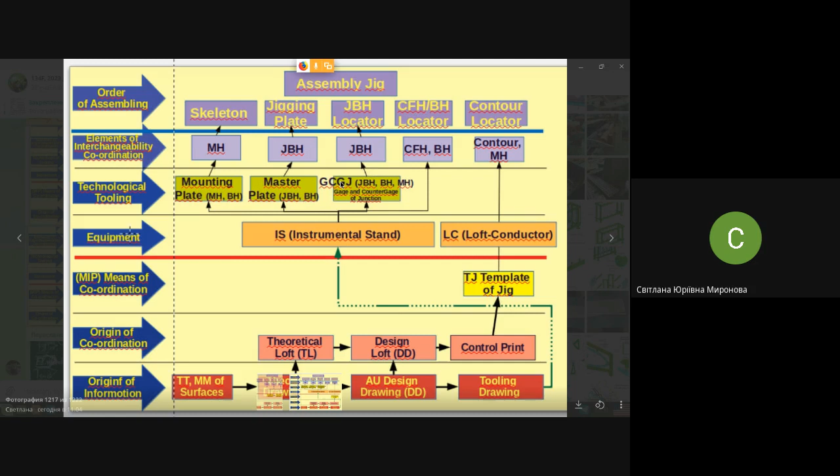Why only there? Because locators of JBH must be located by - you see it here - the gauge of the jigging plate, and the JBH locator, they are located by the gauge of junctions. Here is, you see, gauge and counter gauge, or junction unit. Gauge and counter gauge, imitator of junction.

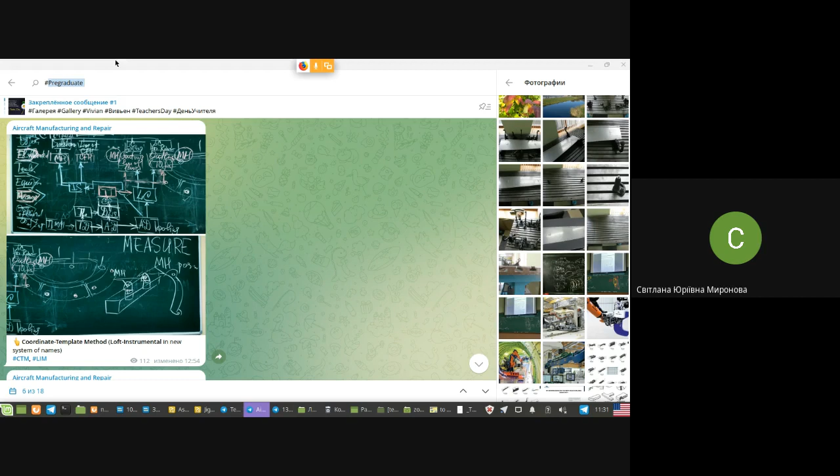Where have we seen it today? We've seen it again. Let's come back. No, I didn't copy it to you. Great, where have we seen it? Junctions. Where have we seen gauge and counter gauge? Oh sorry, I skipped it.

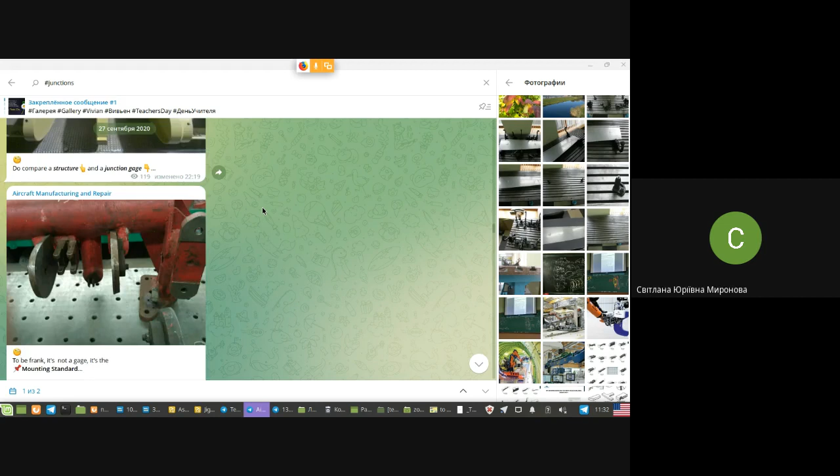Those things - no, they are mounting standard. Oh, gauge and counter gauge of the junction unit.

This gauge and counter gauge, it's necessary to attach JBH locator and jigging plate to such a gauge when it's inside of jig.

Why do we use a gauge? Why not just measure it? Because the JBH's accuracy demands are very high, and above all, because a mistake in the coordination of these holes will be found out only at the last stage of assembling, when it's already too late. It's the final assembling, when it's already too late to change something. You have billions of dollars already spoiled, and now it appears you need to start from the beginning.

Techniques of measuring by junctions are considered not enough, not reliable. This is why in real manufacturing, compulsorily all the places with JBH holes are located into jigs, and jigs are produced, mounted by special gauges, and gauges are coordinated between each other, like gauge of the wing, gauge of the fuselage. They are all coordinated, joined, checked together, so that they correctly imitate the junctions of the airplane, especially when it comes to hanging of control surfaces, hanging of take-off and landing mechanizations, like flaps, slats, and so on. It's too important to leave it to random factors, whether you make a mistake or not. At the end, in 5 years, when you finalize manufacturing of the airplane, you will know it.

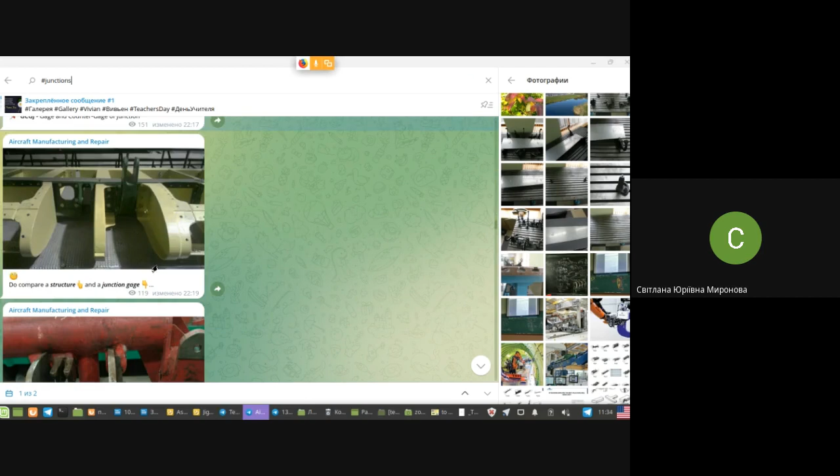And what about jigging plate? Jigging plate, I hope you also remember. I hope, but my hopes become weaker and weaker. When we have a flange junction, we have an additional kind of tooling.

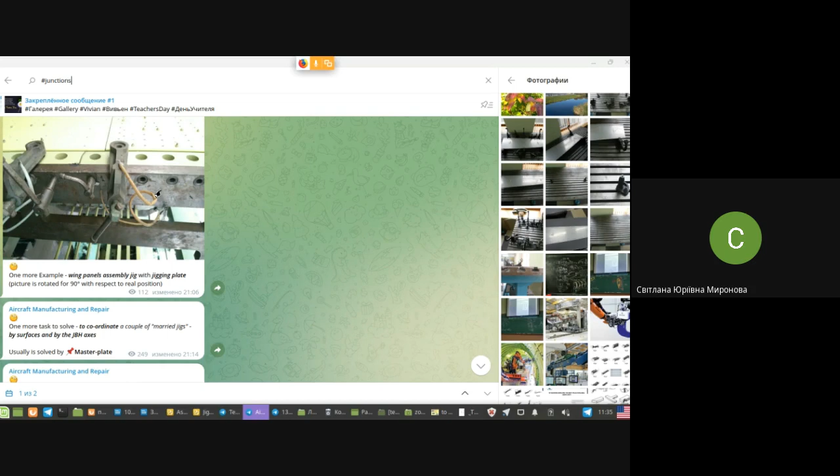Wait a second, searching. Let me explain it. Here is one more task to solve: to coordinate a couple of married jigs. Yes, we have jigging plate here. Jigging plate, you see, one more example, wing panel.

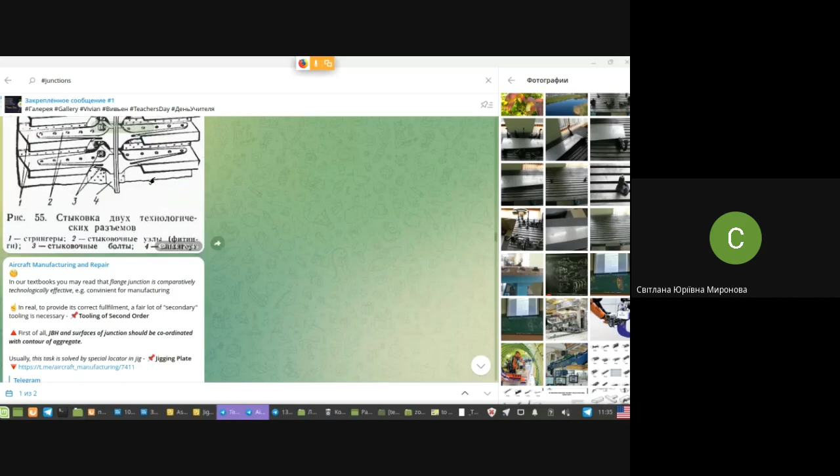Jigging plate in positions. Center wing model. Jigging plate. We may find flange junction, tooling of second order. Here is, here it is first time mentioned, jigging plate. And how to coordinate two married jigs, for instance fuselage and wing, or fuselage and stabilizer.

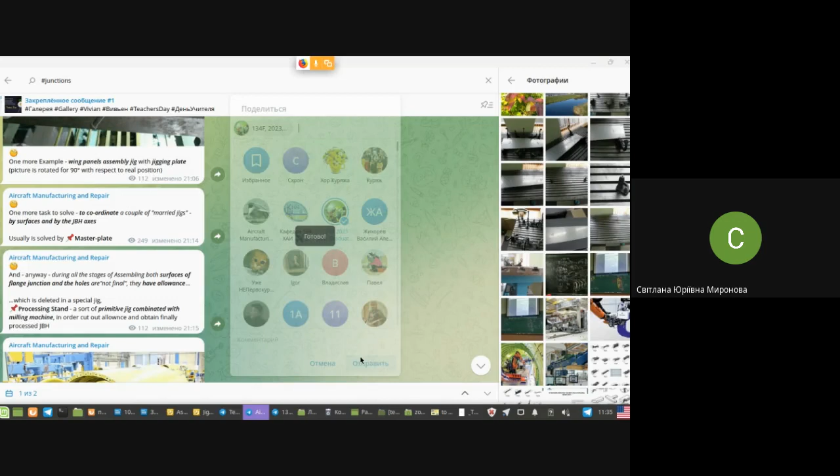For this we have one more tooling: master plate. Master plate, or another name so you remember this master plate, I even call it mother plate. Look at this. Master plate.

Master plate is the mother plate necessary to coordinate a couple of jigging plates. One is in your aggregate. For instance, you have a rib of the wing, and for the wing you have a jig of wing. For fuselage you have a jig of fuselage. So you have two jigging plates, but they both imitate the same place of junction, wing to fuselage.

In order for them to coincide in holes and surfaces, we make an imitator of the junction, the master plate, and next the master plate is necessary to copy it to the left side and to the right side. This left and right side will serve as jigging plate in the fuselage jig and in the wing jig.

So master plate is somehow an imitator also, of some element of this gauge of junction. But master plate has connection only to the jigging plate. Gauge of junctions is already an imitator of all the junctions that you have, and master plate you need for manufacturing of the jigging plate itself.

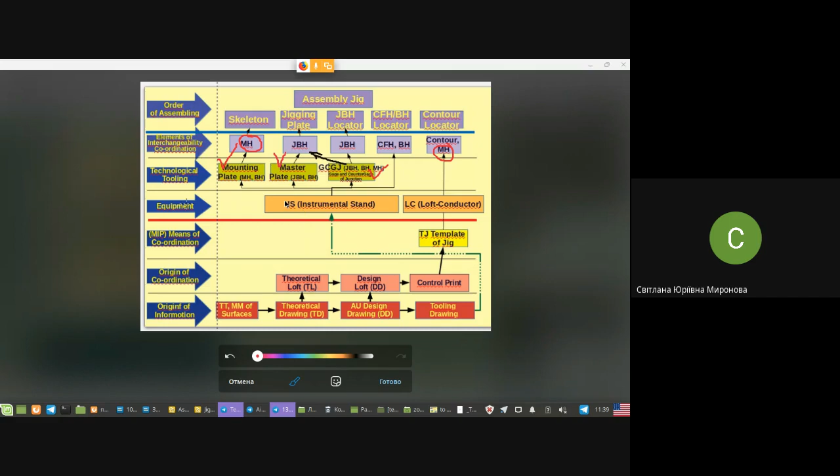You need this one, that one, because of the appearance of mounting holes, you see. As soon as mounting holes appear, you already need all this additional tooling.

Oh my. Well, let's stop recording, at least for a while. My little birds, as beautiful as you are, my little birds.